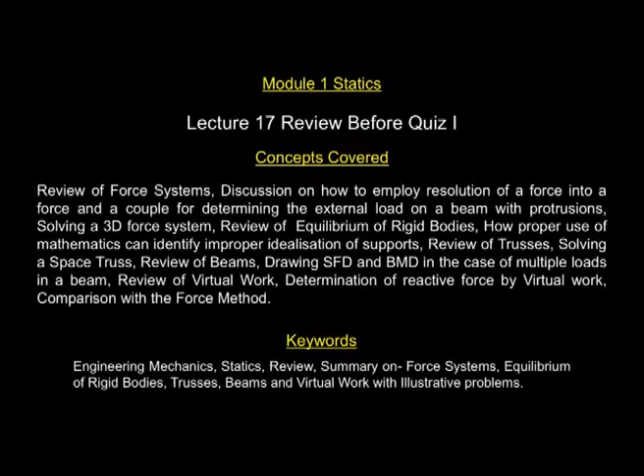So in this class, let us review the subject that we have learned so far. In the first chapter, we discussed force systems. We have looked at concurrent forces, which are also seen in trusses, and we discussed how in practice all forces are actually distributed.

When I have a pin and a hole contact, we replace it by a concentrated force, but if you really look at what happens, you have a distribution. Rigid body is an idealization, and concentrated force is also an idealization that goes hand in hand with the rigid body idealization.

Then we have also looked at body force, which you get from a rotating platform like this. Another important concept is that we have to quantify the rotating effect of the force. We understood the meaning of bending moment and so on.

One of the important concepts we understood in the process was transmissibility of force. When we look at the external effects, it is independent of the point of application of the force along its line of action.

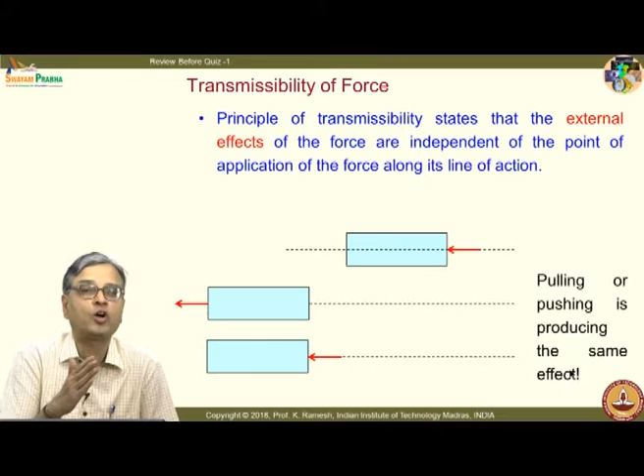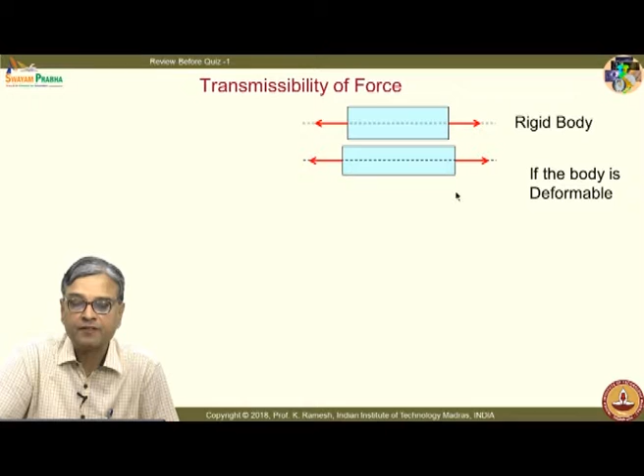Suppose I look at what happens when I apply two forces like this - this is applying tension. A rigid body, by definition, will not have any change. If the body is deformable, it would get elongated. If the body has a compressive force, it would get compressed.

And what we learnt was, even though the internal effect is different, the shape of a rigid body will not change by definition. This makes our life fairly simple at the initial stages of the course.

We have also learned that force is a sliding vector, sliding along the line of action. This is particularly useful when you have to reduce a given force system into its resultant, or when I have multiple forces acting on it. To find the resultant, you use the principle of transmissibility to simplify the force system and find the resultant comfortably.

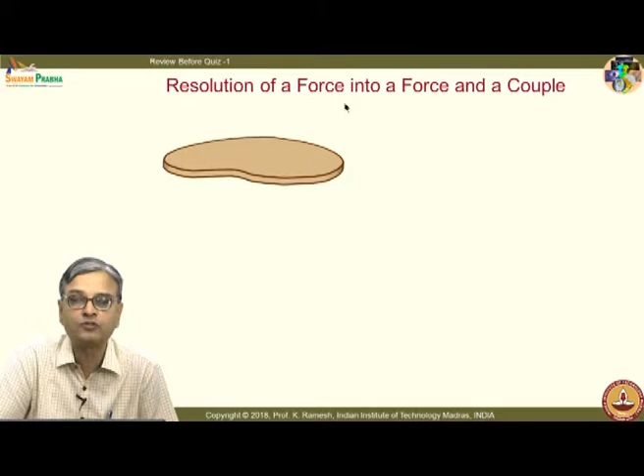Then the important concept we learnt was the meaning of resolution of a force into a force and a couple. I take point P1 and I have a force F acting on it. I can freely move this along its line of action.

Suppose I want to find out the effect of the force acting at point P1 when transferred to point P2. I cannot simply move the force to point P2. To maintain the external effect as the same, I can add another force and subtract here - I have put this force here and subtracted this force here.

This is similar to the situation here. Since we have learnt the meaning of a couple force system, we could visualize this force and this force forming a couple, with the perpendicular distance as d.

So I can visualize sliding a force from this point P1 to P2. It actually amounts to, in addition to a force, you also have a moment, and we found that this is a free vector - I can slide the force along its line of action.

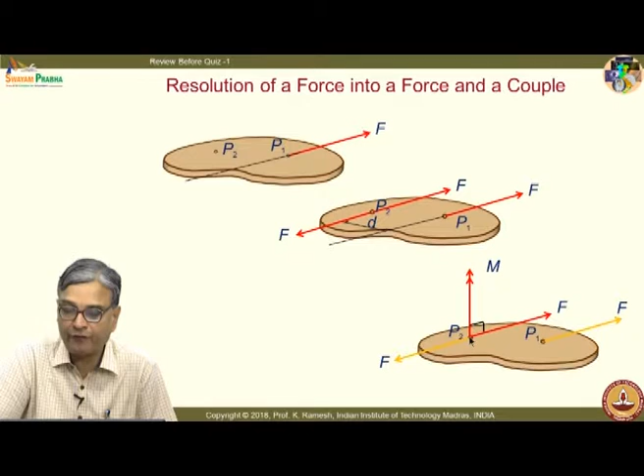It is fairly simple, but if I have to move the force from point P1 to P2 while maintaining the external effect, I have to have a force as well as a couple. This finds repeated applications in the study of mechanics, and I have advised that you should master this technique - you can also reverse the above procedure.

If I have a couple and a force, I could find a force acting at some arbitrary point, which we will have to locate. And we understood the subtleties between a moment and a couple by taking this example.

I have a force acting on this handle. Now I want to find out the effect of this force on this shaft. The free body diagram is shown here.

Let us go in stages. I have the force acting at this point, at a distance b away from the plane on which I want to find out its effect. I would move this force horizontally like this.

We know I cannot move this force horizontally unless I have a couple. So this would result in a couple which is given here, which will be F into B.

Then I would move this force from this level to the level of the x axis. So I have this force when it is moved, what I will have is a force acting on it as well as a twisting moment. My ultimate interest is to rotate the shaft, but if I apply the force with one pin like this, it would introduce a force as well as an additional moment Fb. On the other hand, if I put an equal and opposite force system, it would only produce a twisting moment on the shaft.

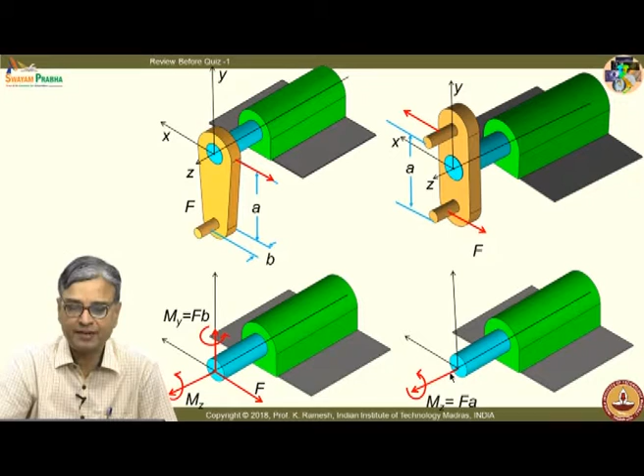So we have a necessary foundation, and one of the common doubts students had was, you had shown a beam and there is a welded arm like this. I have a force P acting on it. And when we discussed in class, we replace the force acting at a distance on an extended arm as a force and a couple acting at point B. This comes out naturally if you look at how you apply the principles you have learned.

But the doubt was, you said the force is following a principle of transmissibility. Why not I simply move the force and find out the bending moment acting on the beam? Why not I do that? It is because you have not understood the concept very clearly, and I would counter it by another example.

See, in this case, when I move this force, the member is still there, and then you are able to have the force hitting on the member. The member as such does not feel the force like this, it is feeling only at the point of weld. That is where the confusion is.

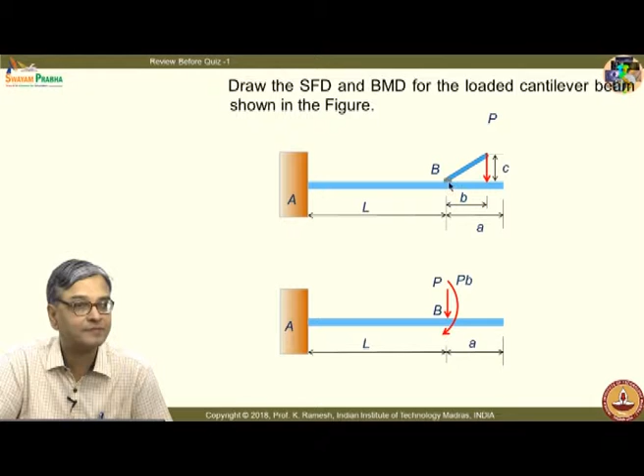Suppose I have another problem where I attach a bar like this and I weld it here, I apply the force here. Now let me use your argument of transmissibility. I have this is the line of action, and then the force is moved along the line of action. It is not touching the body of the beam anywhere, like in the previous example.

When I have a force system like this, you would naturally feel I cannot move the force like this and then try to find out what is the effect on the body. You would only see that this is the arm attached to this body, and you would naturally reduce this as a couple acting like this.

You have to look at, yes, principle of transmissibility tells pushing or pulling has no difference, but you cannot apply it randomly. When I have a beam, when I have an extended arm where I put the load, the beam senses that force only at the point where it is attached.

So you have to apply the principle properly when you want to understand what is the force system that is happening on the beam. Is the idea clear? This is one of the doubts that students have raised. Why not I simply transmit the force?

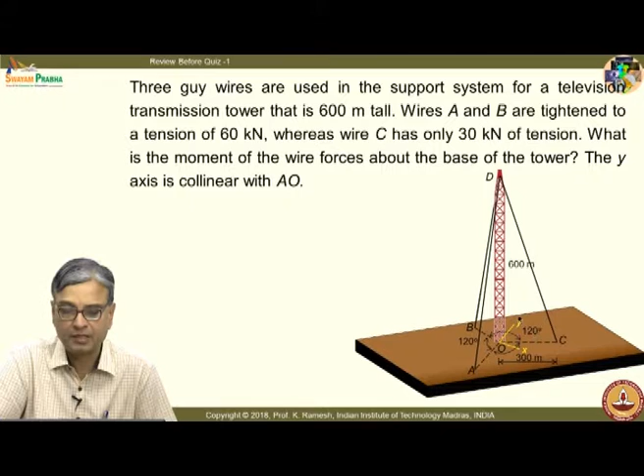When I have to do a problem like this, I have to first identify the coordinates of the key points. I have point A, point B, point C - that comes from your geometry. Then you have to have the coordinate of point D.

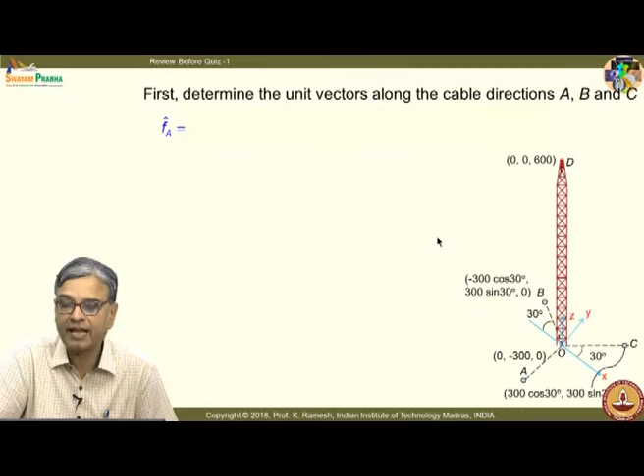Then I have these guy wires that are cut, and they would essentially transmit tension. We also label them as FA, FB and FC. The first and foremost step is I need to find out the unit vector along these forces.

For me to write the unit vector, it is easier if I write the coordinates first. If I have to find out the unit vector from D to A, final minus initial divided by the distance gives me the unit vector like this. Similarly, I will have to do for FB and FC.

So there is no big deal, you just have to do a little more mathematics. That is the reason why I said let us not focus on 3-dimensional problems. Concepts can be better understood when you solve 2-dimensional problems, and you will also be forced to visualize. That visualization is very important for engineering.

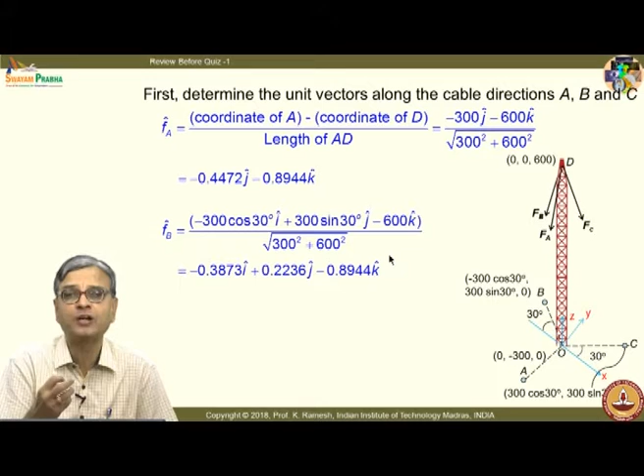So I get the unit vectors along these directions, and then you have simple mathematics. I have to find out what is the tensile force acting on the guy wire.

I get this value because it is given in the problem what is the tension in A, and I have the unit vector, so similarly I can find the force acting on guy wire B. I can also find the force acting on guy wire C. It is all fairly straightforward, with a little bit of arithmetic involved. Other than that, the procedure is very, very simple.

Then I find the net force. This is FA plus FB plus FC. I get this quantity like this.

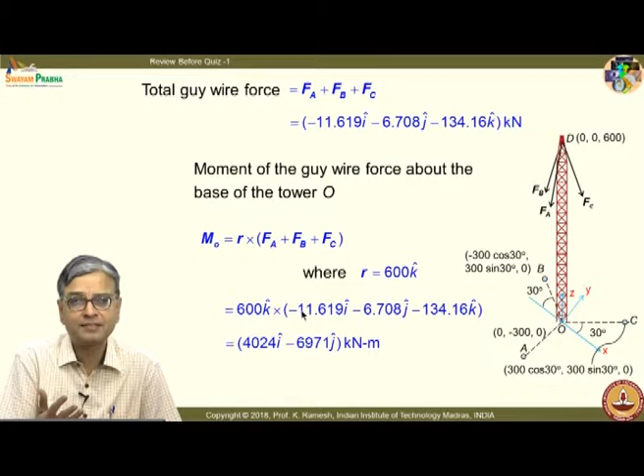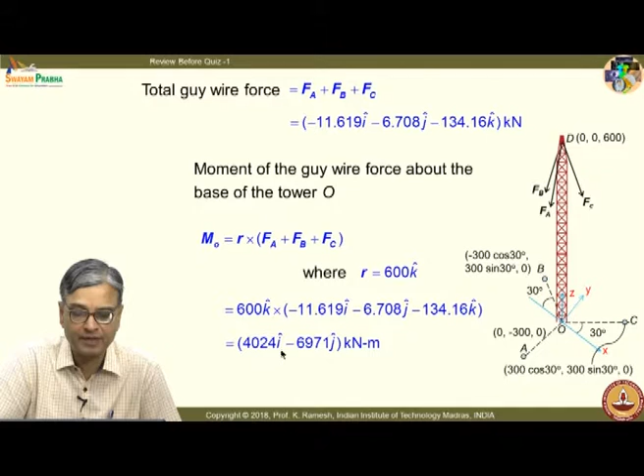Then I have the moment, I simply put it as R cross F. You have already learnt R cross F, and it is very difficult to visualize in a problem like this, but your R cross F will automatically give you the necessary result that you are looking for. So I finally get this as 4024 I minus 6971 J kilonewton meter.

So scaling from 2 dimension to 3 dimension is fairly simple. You have all the fundamentals required to solve such problems. The only requirement is you have to apply them systematically - you have to be patient in identifying the coordinates, find out the unit vectors properly, and then do the arithmetic.

Then we have also looked at, in many systems you could identify equilibrium very easily if you recognize that you have a 2 force member or a 3 force member. And the question raised here is, if you have to keep a body in equilibrium, you need at least 2 forces. And how should these forces be?

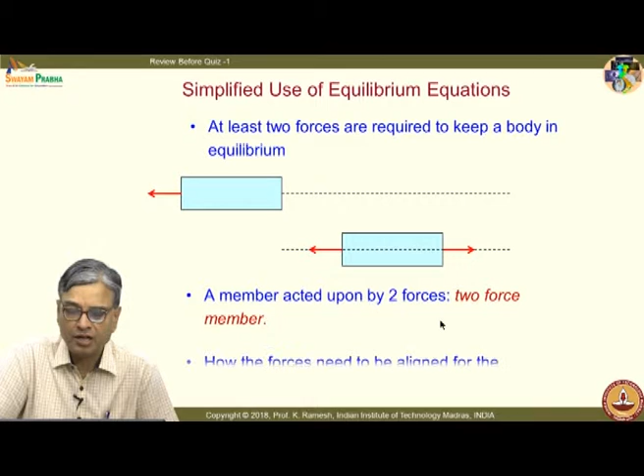They should be collinear and equal and opposite. You would use this property when you recognize in an assembly of rigid bodies that there is a 2 force member - you use this information effectively to reduce the complexity of the problem.

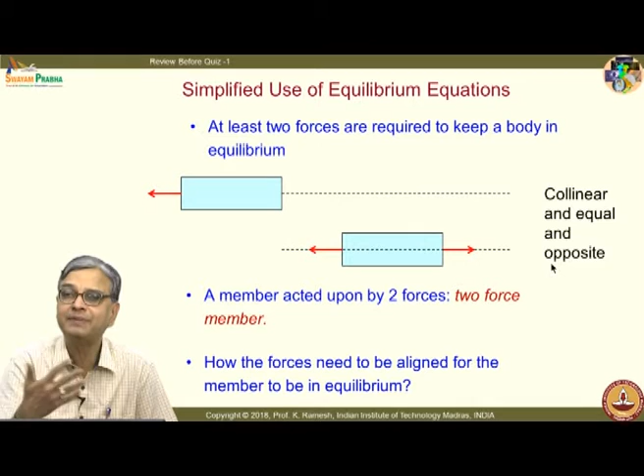We have done the problem of a crimping tool. Initially it was looking as if it is too difficult a problem to solve. Once we split it up as links and identified 2 force members, the problem was very, very simple. 2 force and 3 force member assembly is what you come across in many problems - it is a very important clue.

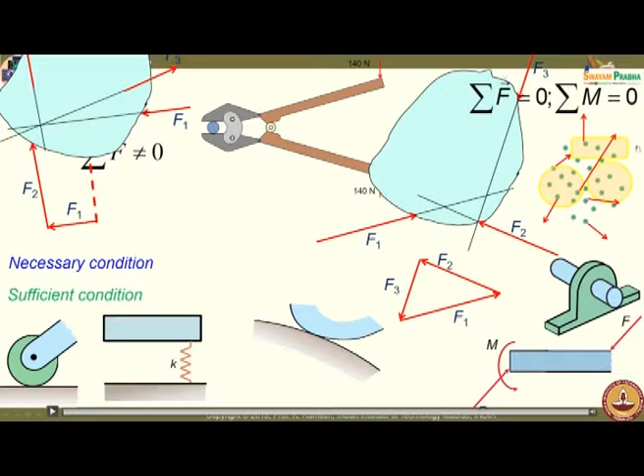And we have also discussed, if I have to have a necessary and sufficient condition for equilibrium, I have to look at every conceivable subsystem.

And we have also looked at different types of supports. I have a roller support, I have this bearing, so on and so forth.

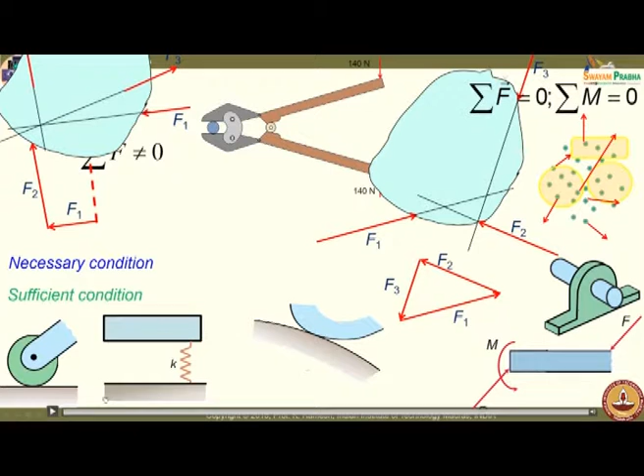Then the question is, yes, when we had discussed the necessary and sufficient condition, in that chapter I took up 3 example problems. I did solve for the system as a whole, and for some sub-assemblies we verified whether F equal to 0, M equal to 0 is satisfied.

Have we done that for all other problems we have discussed later? If you go back and look at the truss problem solved by the method of joints, in fact we did that. We have taken joint A, isolated the joint, and we have also put the forces to start with as away from the joint. Then I had used the arithmetic and found out what is the actual force, reversed the direction, and then I moved to joint F.

And I put these forces properly, and my arithmetic gives me the correct direction of F. So, what we did was, we isolated this subassembly. At least in the method of joints, even without your knowledge, you had verified the equilibrium condition for every conceivable subsystem.

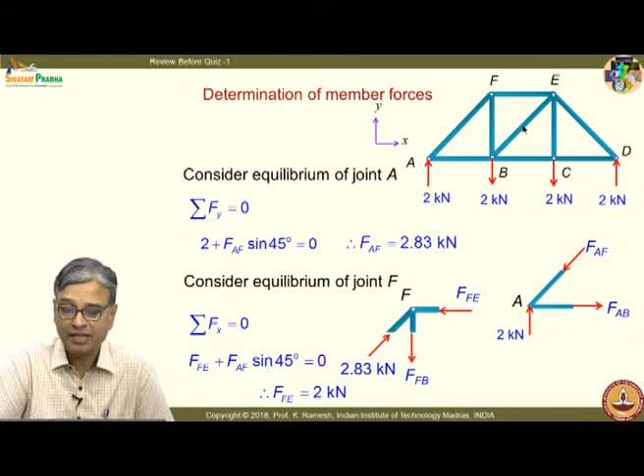There is a nice example in Crandall and Dahl, the first chapter, where he has given a nice problem. I wanted you to do the reading assignment, and this is a universal joint. If you look at a truck, at the bottom you will have this. From the engine, the rear wheels are driven through this universal joint. It is very prominently seen in trucks.

You have a look at it. You learn engineering only when you look at systems around you. So, you need to transmit torque from one axis to another axis. A simplified model was taken up in Crandall and Dahl, and they have analyzed it.

What they did was, they have taken the bearings to start with as thin bearings. When you have the bearing as thin, suppose I have the load - this is also slightly thick, I should have had just half of it. And when I apply a force, it will just come down, and I could replace the role of a bearing simply as a single concentrated force.

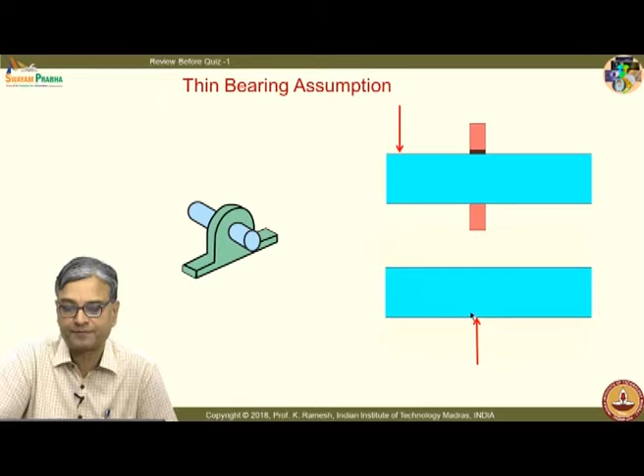So, if you do this kind of assumption, the problem is initially solved. You have reactions at the bearing, a single reaction in this plane, single reaction in the other plane, and they have analyzed the system as a whole and got an expression relating the torque MA and MB, and the result was equal torque.

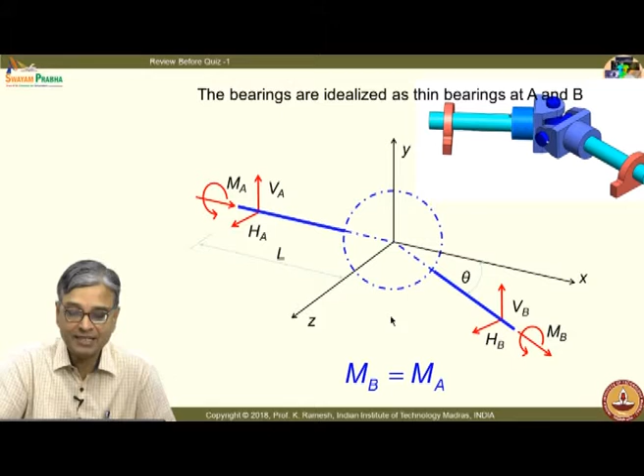Then he dismembers the subassemblies, and he finds the equilibrium condition is not satisfied in a subassembly. Then he raises a question: what has gone wrong in the process? Because when I say the system is under equilibrium, it should be satisfied for the system as a whole as well as all the subassemblies. When he does that exercise, he brings in an important factor.

We have considered the bearings as thin. If it is a thick bearing, when I have a force, it will have a situation like this. It will be inclined and it will make contact at 2 points. This happens on the vertical plane, this happens on the horizontal plane. When I show it for 2 different planes, you can visualize it for any other plane.

So, replacing the bearing reaction as a single vertical force is not going to solve it. And when I have 2 forces, it is also going to transmit a moment. So, the mathematics has helped in improving the idealization. This is where the mathematics helps.

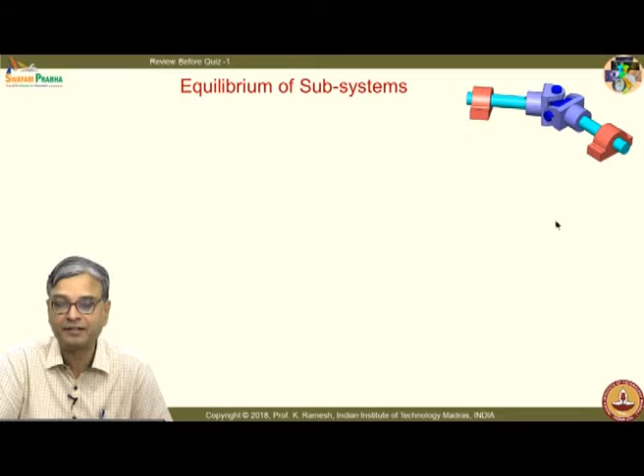When they do this analysis, the bearing can no longer be idealized as a thin bearing, it should be idealized only as a thick bearing. And when you translate it in the free body diagram, I would have 2 forces acting at the place of the bearing. And when you do this, subsystems as well as the system as a whole remain in equilibrium.

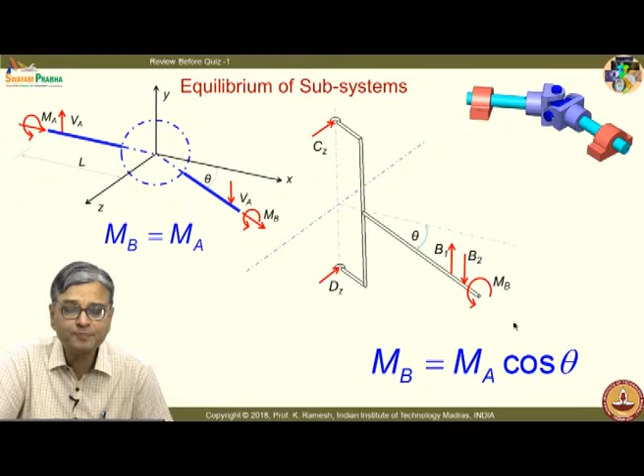And you get altogether a different answer. The torque here is MA cos theta for this particular configuration. For another configuration, the expression would change.

So, the focus here is: as long as your idealizations are clean and neat, and that reflects the physics of the problem, when you find the condition satisfied for the system as a whole, subsystems also will satisfy it. Because problems dealing with truss or beam are so simple, and you idealize the supports, these idealizations are reasonably good - even though we have not specifically insisted on analyzing the subassemblies, the answers were correct.

So, the message here is: compare the predictions with the behavior in the actual system by an experiment.

It's not that you just idealize a problem and solve it arbitrarily. You are trying to understand what the actual problem is, how well you have understood it, and how to verify whether your modeling is correct.

The ultimate goal is that it has to satisfy an experimental result. If satisfactory results are not achieved, reconsider the steps of analysis. A frequent difficulty is a failure to select an appropriate system to define actions on it by its surroundings. So there could be a problem in what you identify as a system.

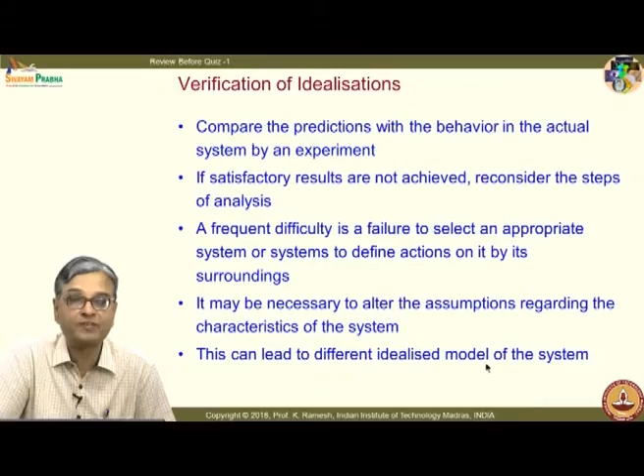It may be necessary to alter the assumptions regarding the characteristics of the system. This can lead to a different idealized model of the system, as we saw in the nice example of the universal joint.

It is also difficult to coin simple problems to illustrate concepts. You should at least appreciate the team that coined this problem and figured out how mathematics ultimately helps.

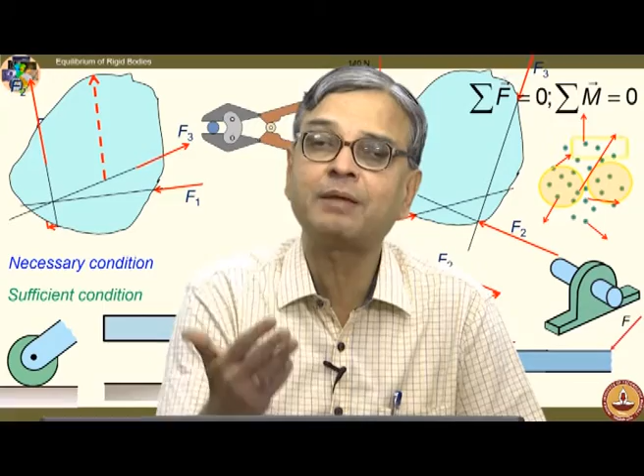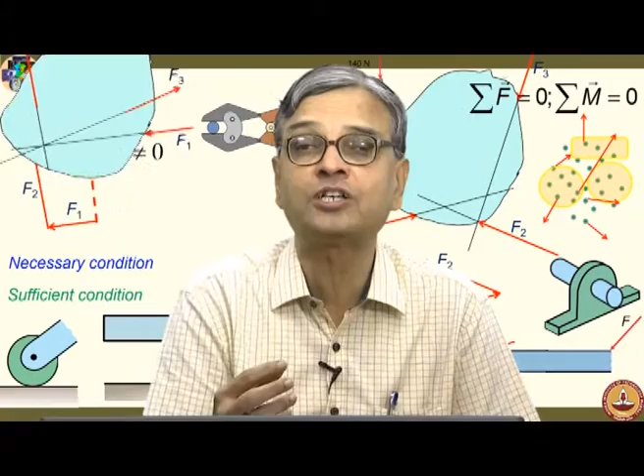We have all along said that if you are not dealing with problems involving friction, I can assume the reactions in any direction, unknown forces in any direction. My mathematics will tell me what is the correct direction. And here, if I verify the necessary and sufficient conditions, it also helps you verify whether the idealizations you have chosen to solve the problem are indeed appropriate.

One of the most difficult aspects in any engineering is how to identify the forces acting on your system. Do not think that whatever you have studied in this course is great enough for you to feel proud of. You have to keep in mind that we are taking baby steps. We are learning idealized systems and idealized force interactions which somebody has given you, and the whole of engineering lies in how to identify the forces that act on your system for you to analyze.

Then we moved on to discussing trusses, and we emphasized that no member is continuous at a joint. You have a gusset plate, whether it is a 2-dimensional or a 3-dimensional truss. I have idealized the 2-dimensional case as a pin joint, and for a 3-dimensional case, it is idealized as a ball and socket joint. We have also seen that loads are applied only at the joints, which is a very important aspect of it.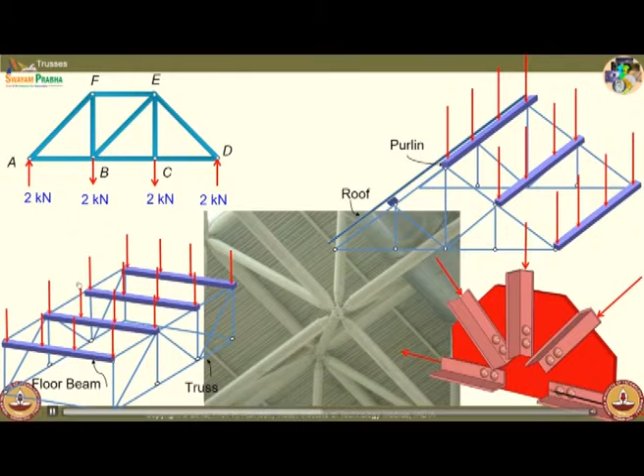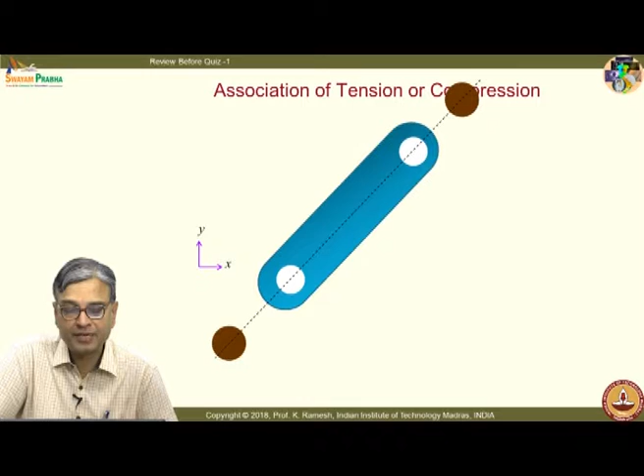We have also discussed how to associate the member force as tension or compression. When I have a pin at a highly magnified perspective, you will have a clearance, and if you assume that the member is under tension, the force interaction has to happen here and here, so that this member is under tension. But if you analyze the pin, you would naturally put the force like this.

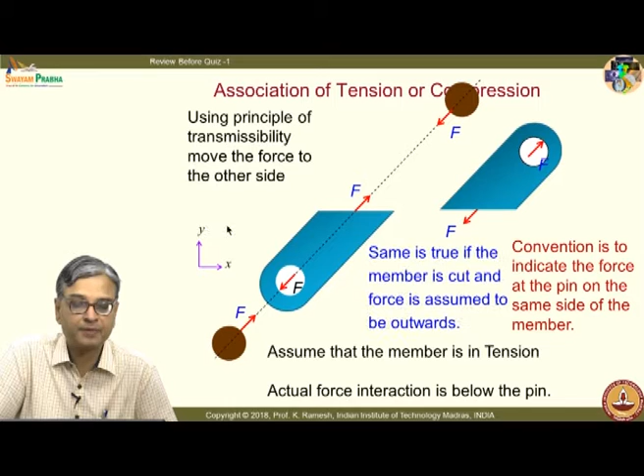Engineering is one profession where you use convention. If you use this kind of approach, you should put the force interaction only in this direction, indicating the force at the pin on the same side of the member. Then you can interpret: if the force is away from the pin, you call it tension, and if it is towards the pin, you call it compression. All that confusion is much simpler if you follow our discussion of isolating a joint along with the member.

It is easy to visualize when you put the force away from the member, it is easy to perceive that it is tension. I have also discussed our mathematics is such that when I get a negative value, it automatically becomes a compressive force.

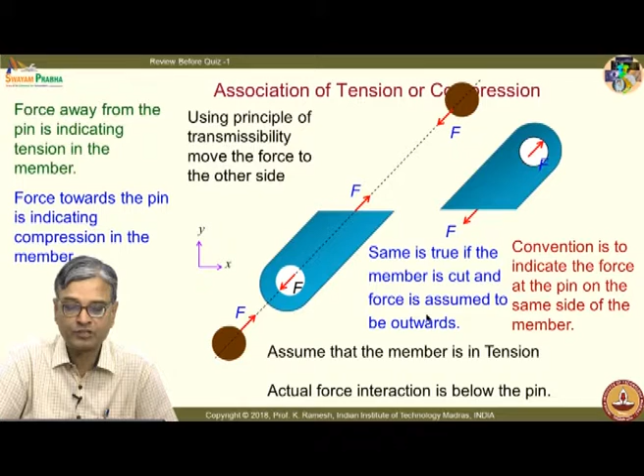We have taken advantage of the choice of unknown force direction to start with. In the case of method of sections, we had taken a section with 4 unknowns, but we could still solve it. I can also do the same trick with method of joints.

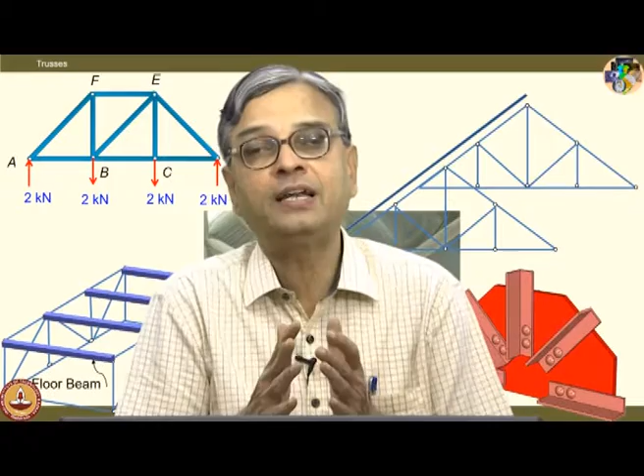Suppose I have unknowns FAC, FAD and FAB. In this case, FAC and FAB are along the same line of action. You choose a coordinate system along this line of action. Even though I have 3 unknowns at the joint, I can find out the third unknown if my interest is only on FAD. The basic requirement is: if I use method of joints, find a joint which has only two unknowns; if I use method of sections, cut a section which has three unknowns.

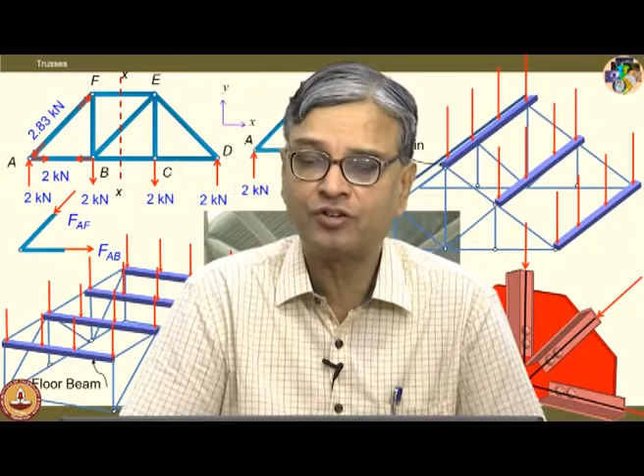We have seen exceptional cases in the case of method of sections. In method of joints also, I can do the trick by identifying a suitable coordinate system. So it is better that you learn the many methods that you have.

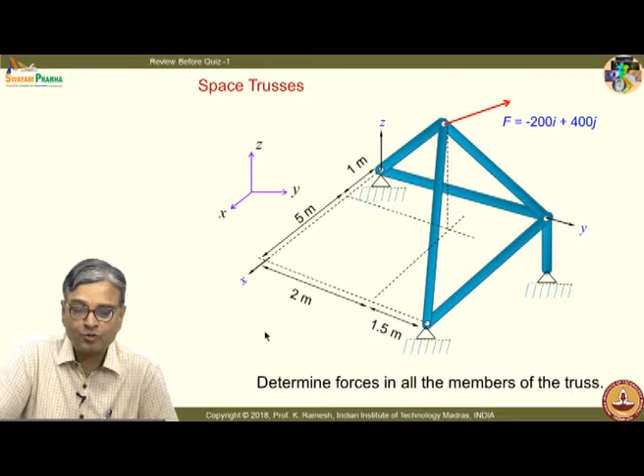We have focused mainly on two dimensional trusses. Suppose I go for a space truss like this, what is the difference going to be? It is all supported by ball and socket joints, and you will have to go back to your vector algebra to solve the problem. Without vector algebra it is difficult to handle a problem like this, and you have three reactions at each of these supports, handled in a similar fashion.

We can also look at whether the problem is statically determinate or not. The main difference is, instead of m plus r equal to 2j, I would replace it by 3j, because at each joint, when I have a ball and socket joint, I can write three independent equations. That is the only difference. Rest of it becomes vector algebra for you to do, and you lose out on visualizing what happens physically.

Here again, this is a statically determinate problem, because I have number of joints as 5, number of members as 6, and reactions as 9. So I can solve this problem with m plus r equal to 3j.

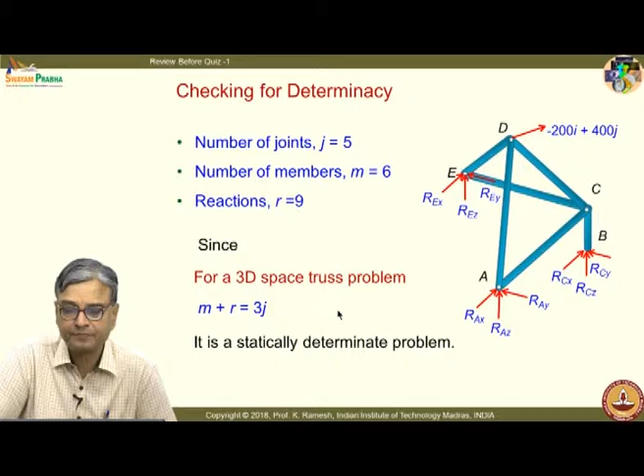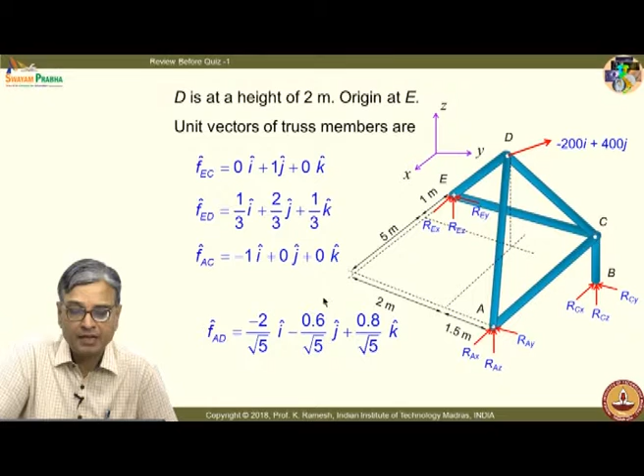When I do this, I have to find out the unit vectors. After I find the unit vectors, isolate a joint like this, and then again resolve the forces like this. Since I have vectors as i, j, k, I can solve for three unknowns by equating the terms i, j and k. Here again you can find the member forces and associate whether it is tension or compression, and so on and so forth. So scaling up from 2 dimensions to 3 dimensions is not at all difficult.

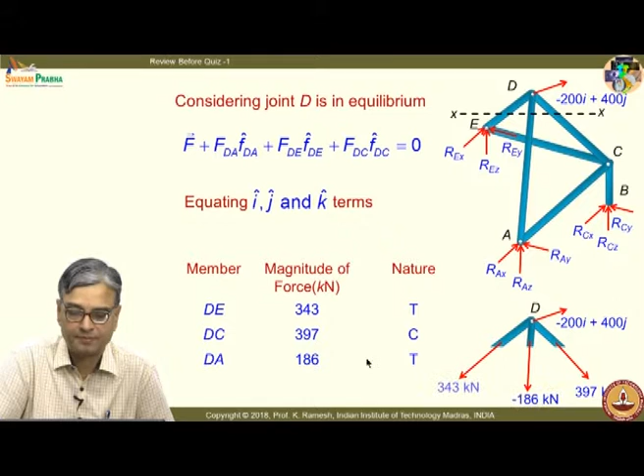That is what I am trying to say. It only involves a little bit more mathematics, but while learning the subject, learn it thoroughly for the 2 dimensional system. You can easily graduate to the 3 dimensional system, where all these forces have the direction also modified, and so on.

Then we moved on to discussing beams. We have understood that any member that supports transverse load is called a beam, and we discussed that we should have the loading diagram, shear force diagram and bending moment diagram one below the other.

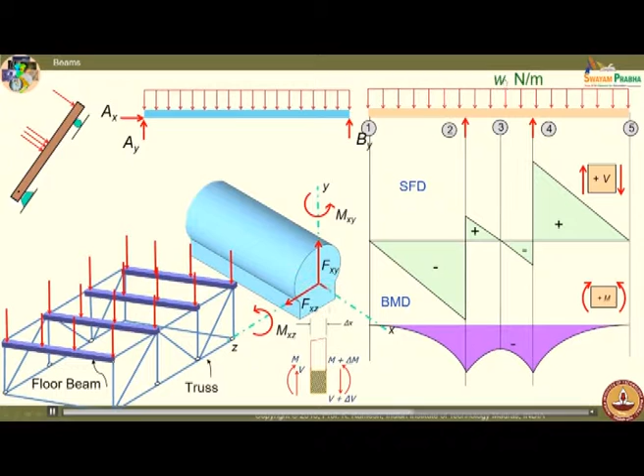In this chapter also we discussed sign convention. It is a discipline, because depending on the problem complexity, you may want to analyze the left side of the beam or the right side of the beam, and you should follow one single convention, so that whatever result you get from analyzing the left portion or the right portion is unique in magnitude as well as sign for you to plot the shear force and bending moment diagram. The magnitude may be the same, but the sign may become different. So it is more of a discipline.

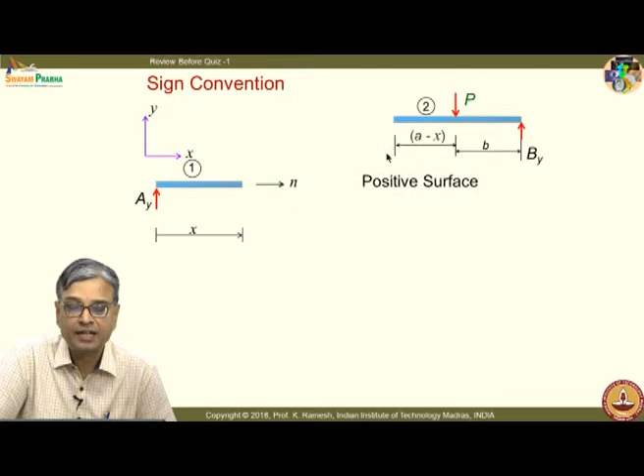What is a sign convention? We have to identify this as a positive surface, and then identify this as a negative surface. Since we have adopted Meriam, we will use that sign convention: on a positive face, positive moment is positive and negative shear is positive. This is what you have in the case of Meriam - I take the moment anticlockwise and shear force downwards.

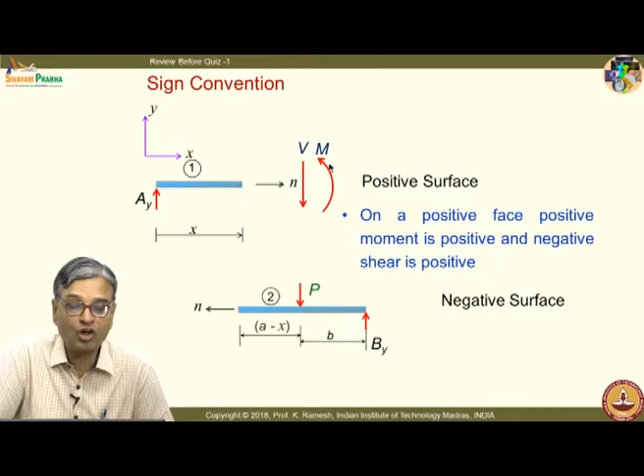This is to draw the isolated section. Once I draw the isolated section, all my signs I have to refer with respect to the reference axis. You should treat this force as negative when you do the force balance - you should not miss that. On a negative face, negative moment is positive and positive shear is positive.

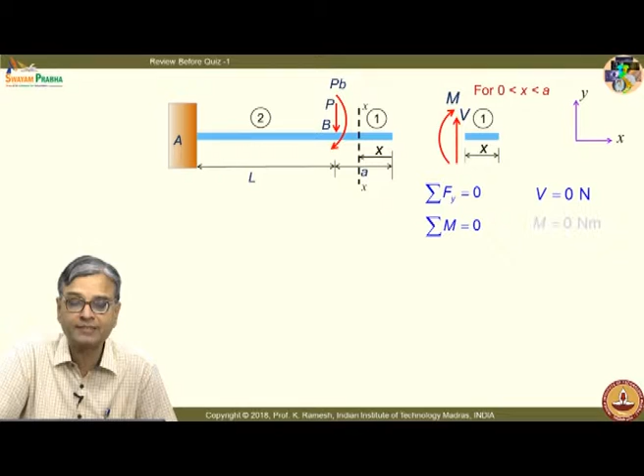We have also looked at the concept that you take a section and then do it. I expect you to do this in your examination. So find out a suitable planning of your answer script, so that you do all this calculation separately and reserve a space to draw the bending moment and shear force diagram one below the other.

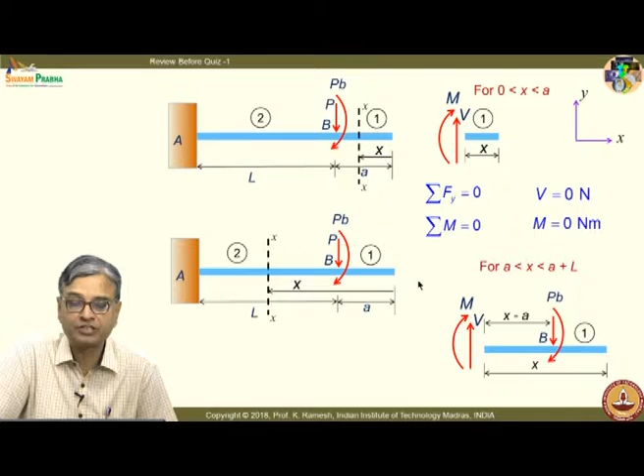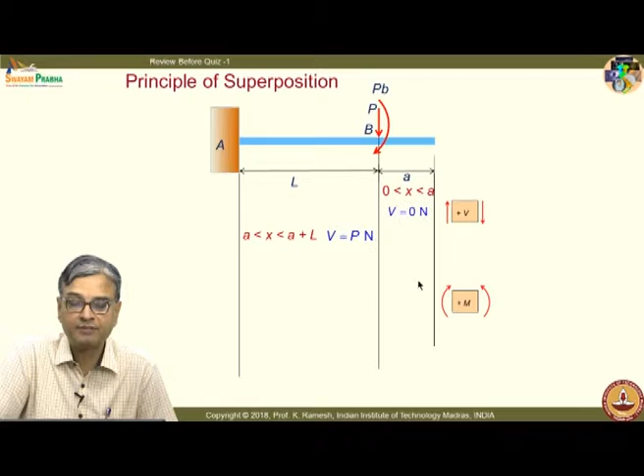We have these expressions, you have seen it earlier. I have drawn the bending moment and shear force diagram one below the other, with these expressions. In this context, I also discuss that all systems in practice are in some way non-linear.

We idealize that as a linear system. Why do we do it? We do this primarily because I can exploit a principle called the principle of superposition. I can think of this problem as consisting of two different loads, load P and load PB. I can get the shear force and bending moment diagram for the load P, and for the moment, and then simply add them to get the answer. This problem is very simple, I just brought it for illustration, but this is a very powerful principle that will be used in your later courses.

Not only this, when I have a slender member, it can in principle transmit 3 forces and 3 moments. We have seen bending moment in the plane xy, and we have looked at bending moment as mxz. Suppose you have a member transmitting force in one direction, and also a force in a direction perpendicular to that. You can apply the principle of superposition, draw the bending moment diagram for this loading, and for the other loading. So the principle of superposition can be exploited for this also. Even though we have not solved any problem, you can also handle such situations.

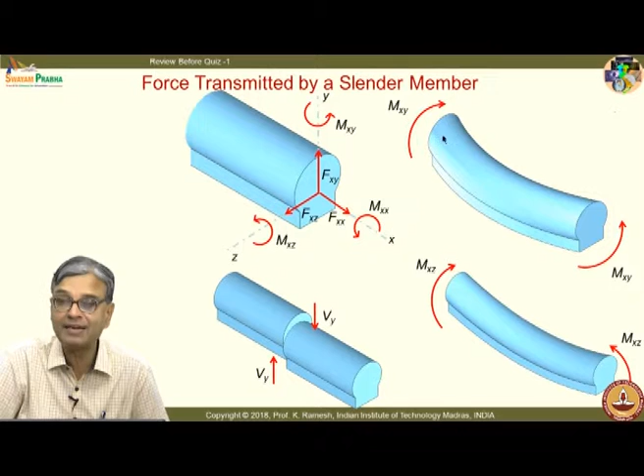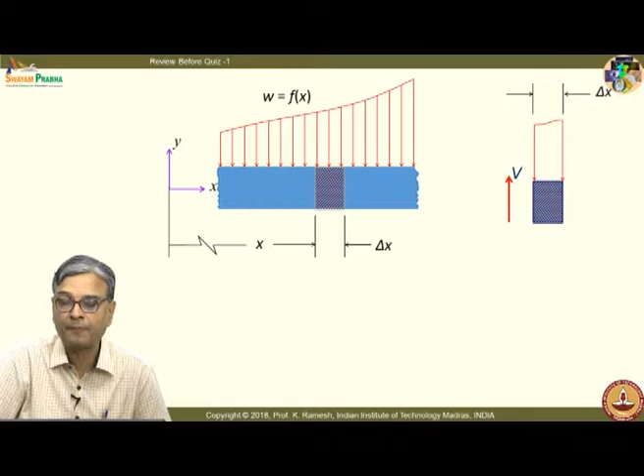Then we looked at when I have a variable load acting on the beam, we developed the interrelationships. We realized that we made a deliberate cut at a section of length delta x, so I have to recognize that there will be variation in shear as well as variation in bending moment. Using this, we got the final interrelationships that relate dV by dx and dM by dx. We have also discussed how you can exploit these expressions to correctly draw your shear force and bending moment diagram.

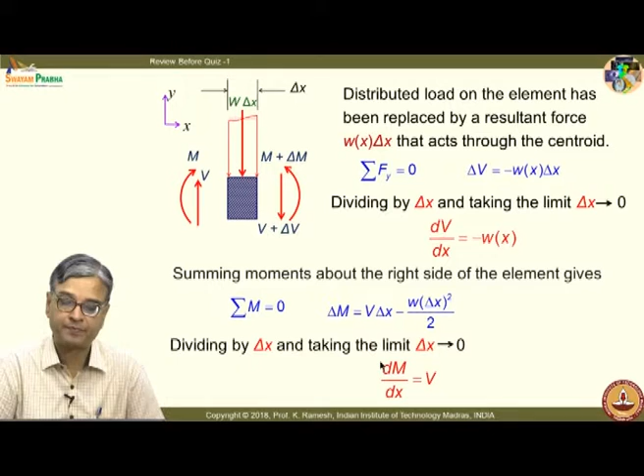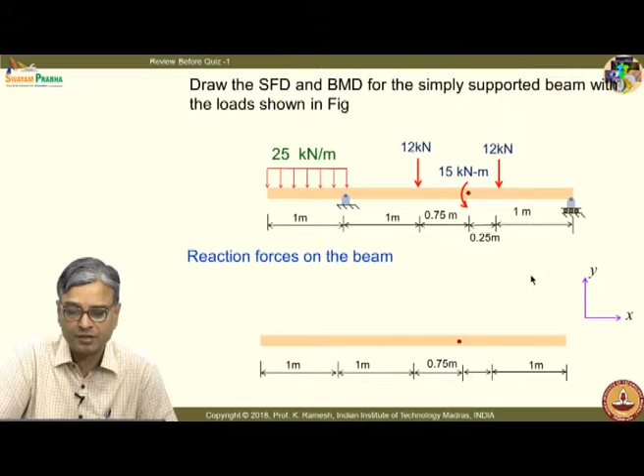I have asked all of you to solve this problem. It is no big deal to make your problem involved in calculation by putting several forces, we have solved a series of simple problems. It is no difficulty at all to handle a problem like this, and I think I have also given you the reactions at the supports, so that there is no difficulty in comparison of your answers. For me to find out the reaction, I can replace this distributed force as a concentrated force, and all of you have determined the shear force and bending moment diagram by taking appropriate sections and drawing the free body.

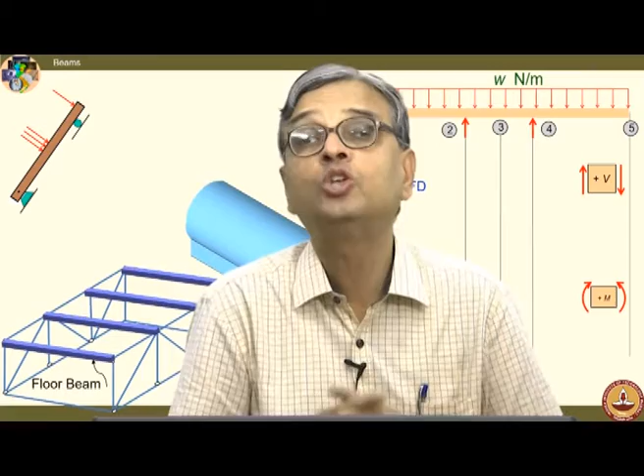Now I am going to discuss a method to verify it. Use this for verification. For all your problems in quizzes and exams, you have to take a section, show the free body, write F equal to 0, M equal to 0, and find out the unknown forces. But once I have obtained all this, how do I verify it?

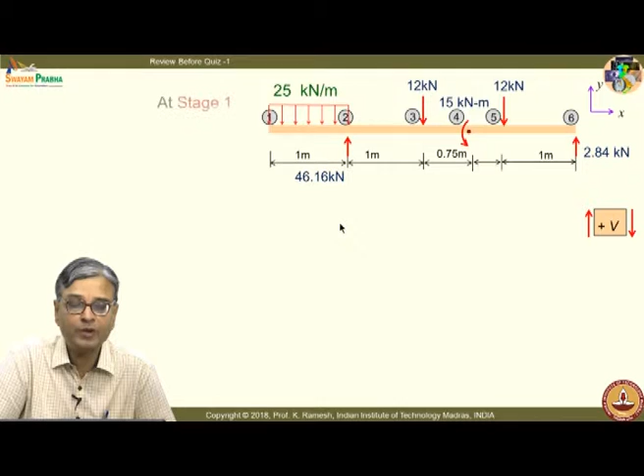For me to plot the shear force, I move from left to right with the Merriam convention. When I start, I have this Wx, x is 0, so I start at 0, and this is uniformly distributed. So from section 1 to section 2, it has to be a linearly varying shear force, and I find out what is the shear force at section 2. I mark this point, and I join these two by a straight line. Then at section 2, I have a shear force, that is the support I have. I can find out what happens at section 3, the value.

I can mark them like this. I should not join this to this point. I should recognize that at this point I have a shear force, so I would join a vertical line like this, then it remains constant till 3. If you do like this, I will come down. When I have the force like this, I will come down. That is how the calculations will be, and then it will remain constant.

The moment has no role to play in the shear force. Then I will come down by 12 kilonewtons, then I will go up by 2.84 kilonewtons. So the plot will start from the left to right. You can trace the forces. The key points are wherever you have external force, they serve as key points. And you should also decide how many sections you need to take to solve this problem.

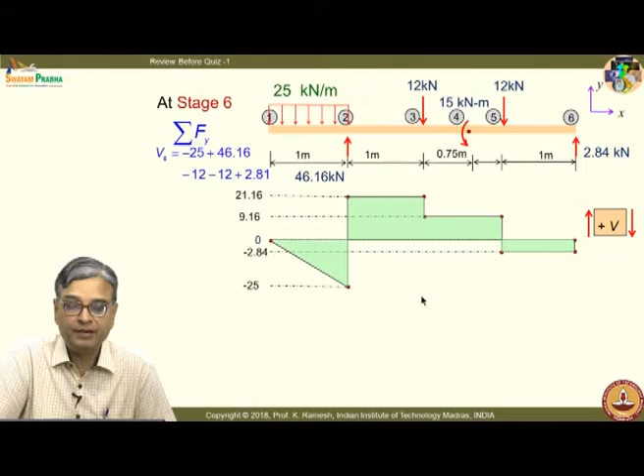Let us go and draw the bending moment diagram. For the bending moment diagram, move from right to left. Simply find out whether it is clockwise or anti-clockwise moment and then keep plotting it, that is all you have to do. For the first one, I have translated the force and indicated that I need to get a moment like this, and I have got this value here.

Many students have asked me the question, how do I handle a concentrated moment acting on the beam? Very similar to how you handle the force acting when you plotted the shear force. So when I go here, I should recognize that there is a step increase in the bending moment at this point, and if you recognize that, then it is very simple to do.

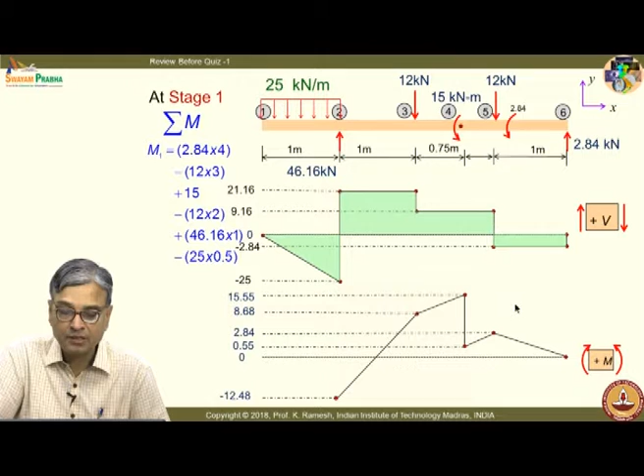And wherever you have load, you have a change in the moment diagram. They are all key points. When shear crosses zero, you have extremum values, and you can figure that out because the slope is zero here. I can figure this out, or even otherwise I can draw a straight line and find out what is the average. If my equation gives more or less, I can find out what should be the curvature of this.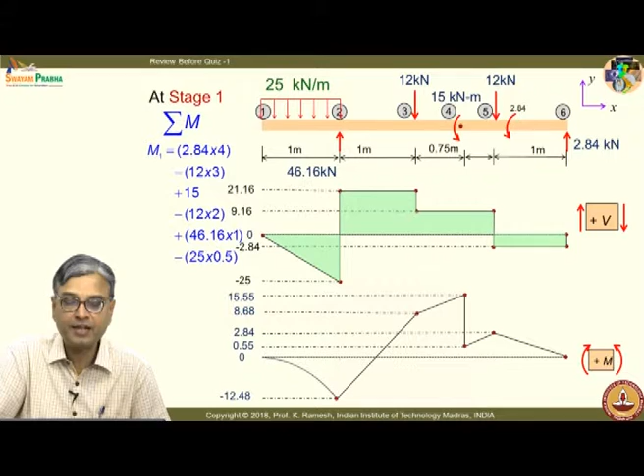Let us solve one very interesting problem by force method as well as virtual work. This kind of press you will come across normally in many industries. I have a handle like this, and somebody pulls this down, then it presses this object here. It is a pin joint here, it is also a pin joint at D, and it is also a pin joint at C. Suppose I have to find out what is the reaction at A.

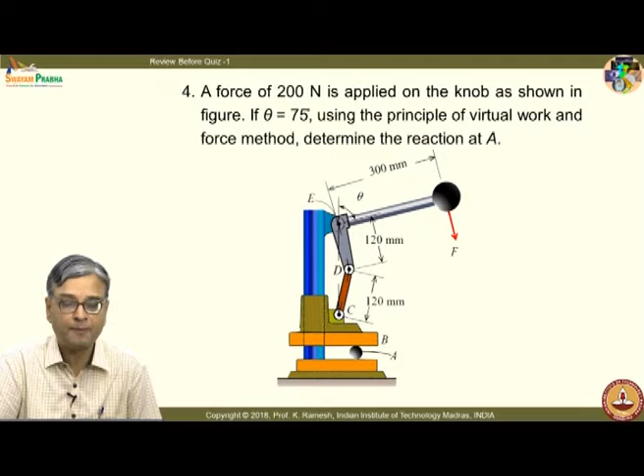By the force method, I have to dismember all of these members, then only I can find out the force. We would solve by both methods, and you will find virtual work takes 2-3 steps to get the final answer, whereas the force method requires computation. In the process you learn how to find out reaction by the method of virtual work, you have to replace it by an active force, which we learned by looking at stability, where we replaced a spring by the restoring force.

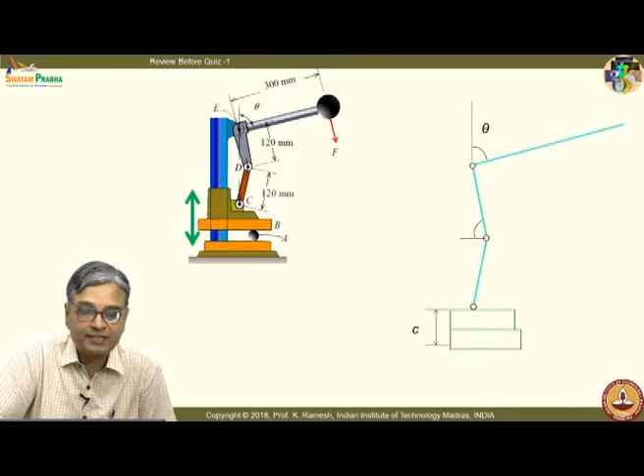When you are solving by the force method, I expect all of you to write idealizations in all the problems. So what are the idealizations you have? Joints C, D and E are pin joints, A acts like a roller, part B moves smoothly over the column. We are avoiding friction, okay, that makes our life simple. And you have the geometry shown as a line sketch, which is useful for the method of virtual work.

And I can also visualize when I pull this, what would happen to the link. So in the case of the method of virtual work, I have to draw the active force diagram, which is mentioned here. I have to find out the reaction here, so I just put the reaction as an active force, and when I pull this, this will also move. If I do not consider that this moves, I will not be in a position to solve the problem.

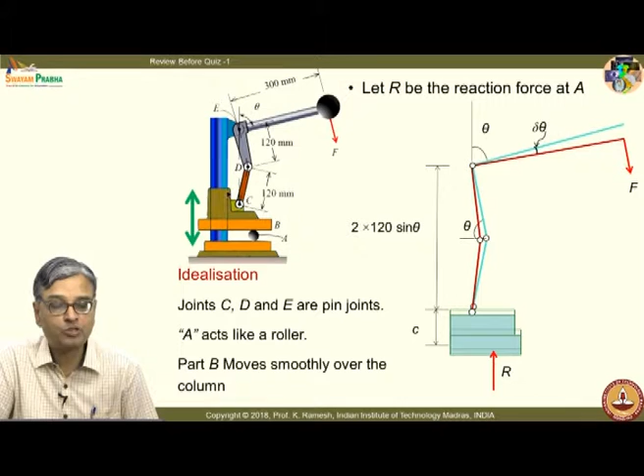So first let us solve this by the force method. The problem looks complicated, but it is not complicated at all if you recognize a few important things.

So, the member DEG is one unit, a single physical member, and when I have a pin joint, I can replace the interaction at the pin joint as two forces whose direction we don't know, so I assume a direction like this. This is connected to link DC, so I put link DC and place these forces opposite by Newton's third law. You should recognize that link DC is a two-force member. The moment you recognize this as a two-force member, the force has to be along its line of action, which makes your life fairly simple.

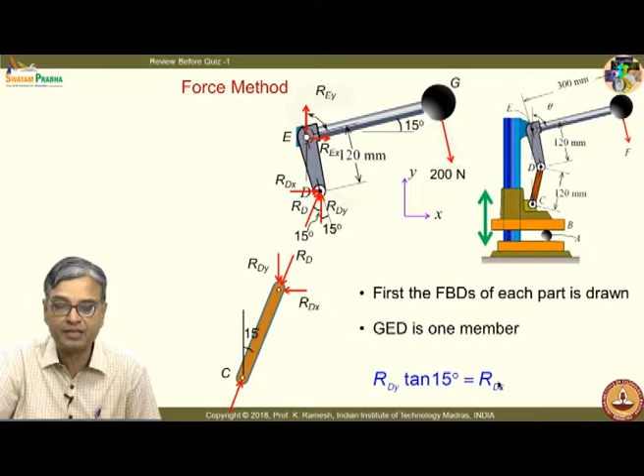Once you determine the force RD, I can put this RD here. My interest is to find out what the reaction is here. I need to find the vertical component at D, so the force at D would be identical to this, and I would replace it. These are all simple mathematical simplifications. I have RDX as tan 15 times RDY from the given problem geometry.

Then I go to the next step, putting only essential things here, and take moment about E. I get the value like this, which gives me RDY equal to 966 newtons, and I get RDX as 259 newtons. So I have dismembered this and determined the forces here, then I have to find out the force.

This force I can easily find out because I have RDY. Then I have to identify what happens with the interaction of C with respect to this bottom block. That is what I have listed here. So you need to have a reference axis.

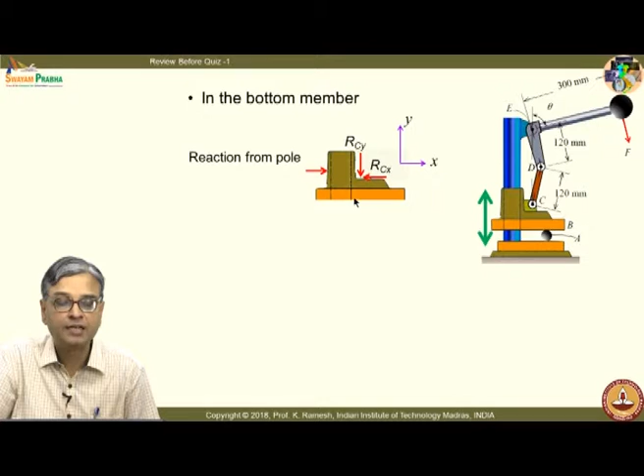This is again a pin joint, which can be replaced by two forces, and you will have a reaction from the pole put as a normal force, because I have smooth movement upward and downward with no friction. This is a roller with a flat edge, and this is also smooth, so I have a reaction R. This clearly shows I have R equal to RCY equal to RDY.

So the question asked is what is the reaction force? We have got the reaction as 966 Newtons. It's a circuitous process, I have to dismember and do it.

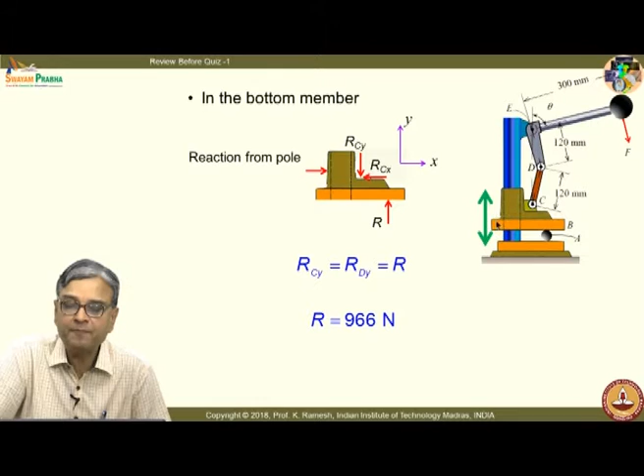This is what is asked, but we will also see what are the forces acting on this member. Can you recognize what this member is? How many forces are acting on this member? You should recognize that this is nothing but a 3-force member. See, many mechanical appliances can be seen as an assembly of 2-force and 3-force members.

I have a force acting on this, which is the operator pulling it down. Then you have the interaction at D, and you can easily say what the interaction at C should be. I have these forces meeting at a point, and it automatically says the force acting at E has to follow this line of action. This also gives you the force REx as 311 newtons and REy equal to minus 773 newtons. This is just to appreciate that a seemingly practical problem can be thought of as an assembly of 2-force and 3-force members.

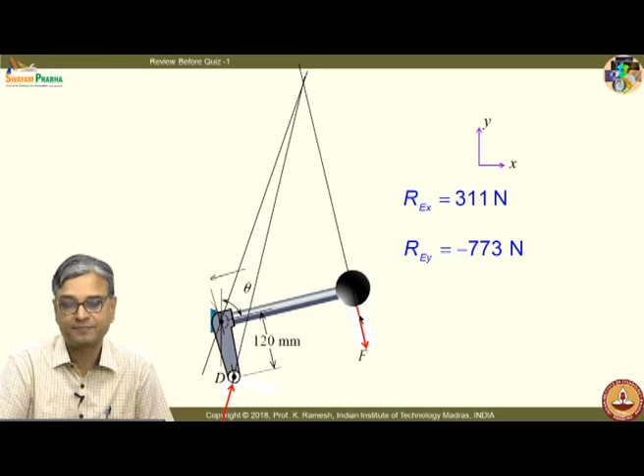Now we move on to method of virtual work and simply solve it in no time. You see the power of virtual work.

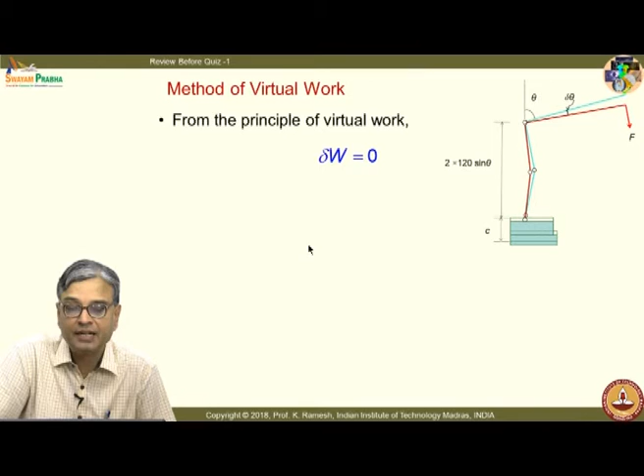I have delta W equal to 0. I have the geometry, and we have to identify the reaction, so make that the active force, and look at what the work component of this is. Here the force and displacement are in opposite directions, so I have negative. Here force and displacement are in the same direction, so I put this as positive, because this is the sign convention we discussed. Don't individually assign a sign for the force or the displacement, look at the work component, look at the product and then assign the sign.

This gives me, in one step, R equal to 966 Newtons. So this brings out the elegance of the method of virtual work. Nevertheless, you will also need to know how to solve it by the force method. I thought it is a nice problem where I can review, since this is a review class, I could show how we solved it by the force method and how we can solve the same problem by method of virtual work.

I suppose we had a fairly good discussion on all the key concepts, including the sign convention used in trusses, beams and virtual work. Thank you.